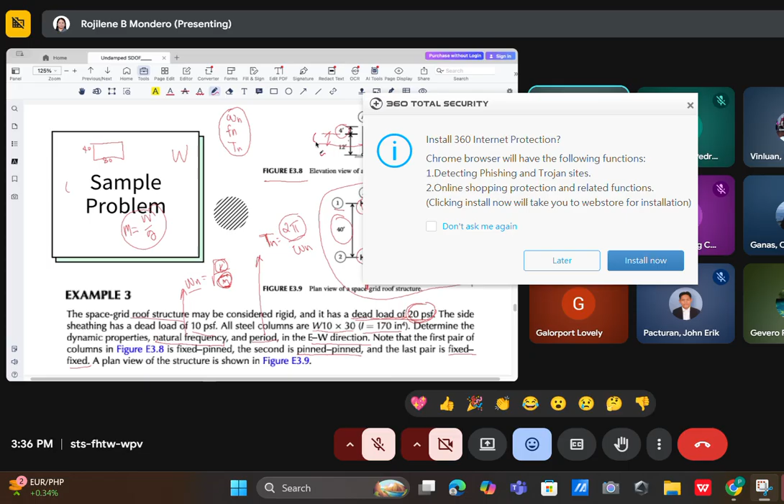So, ikuha nato ang tributary height. Take note also that the tributary height for roof, kay ato ikuha ang dead load, is just half sa below plus iyahang parapet or own height, kung naa. So for this space grid roof structure naa tay height nga 4 feet and then half sa ubos, mao to i-consider as your tributary height. So half of 12 is just 6, plus 4 feet, naa tay 10 feet nga tributary height for the roof.

So to calculate for that one, atong gi-consider ang sheathing, which includes tributary height of the roof nga 10 feet. So if that's the case, kuhaon nato ang iyang tibuok area.

Na, nga lang. So if that's the case, no, kani ato ang kwaon, no, kani nga area. So basically, you just simply add all of this length ni kaning ihang perimeter. Multiply it by the tributary height nga 10 feet. So motong na kay 10 by 240.

So 240 comes with the perimeter of the area of this kanino nga structure nga natay 40, ay sorry, 80 by 40 by 80, then up to 40. Add all of that is equal to 240 nga perimeter. Multiply it by the height, so makuha na to ang sa wall sheeting nga dead load.

Just simply add it with the roof dead load, then we can get the structural weight sa structures nga to ang i-resist, no, sa to ang column. Which is equal to 88,000 pound force or 88 kips.

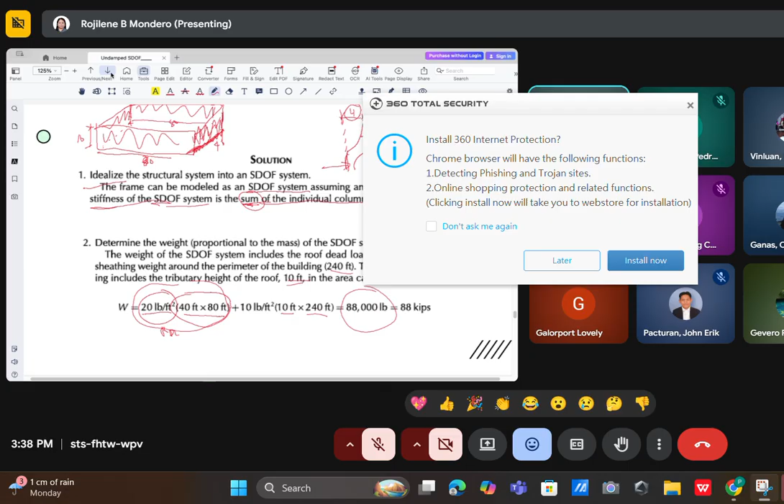So now, okay na ta kang structural weight, no? Makakalculate na tag structural mass later once we divide the weight by the acceleration due to gravity. Taking into consideration that we are using an English unit. So dili ta directly makagamit ni 9.81 meter per second squared. Kay English unit na itong panggamit diri. So we need to convert that one into feet per second squared.

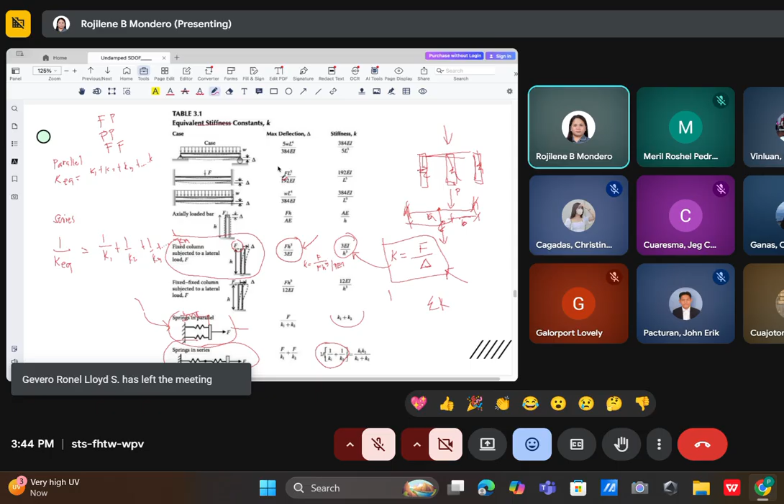Again, I will not provide any formula for deflection. So you must be familiarized or at least memorize the formulas for deflection regardless of the type of structure. That is part of your quiz next meeting. For this one, it's very easy because you're given the formula already. So what if you don't know it? Then you can't solve it if you don't have the formula for deflection.

So for this one, we have fixed-pin, whose stiffness is equal to this one. Take note that the stiffness of column A1 and column A2 are equal, because both are fixed-pin. And also, please take note of this one. If your structure is pin connected at both ends, the stiffness is just equal to 0. The very reason is that there is no amount of force it can exert against deflection, because it is free to move at one point, since it has pin connections.

So it is not the same as fixed connections, which are restricted in all ways: along y, along x, and in moment. For a pin, it is free to rotate. Sorry, free to rotate. When we say free to rotate, it is restricted along x and y only. So the point is that if it has pin connections, the stiffness of that structure is equal to 0. And that is for a column.

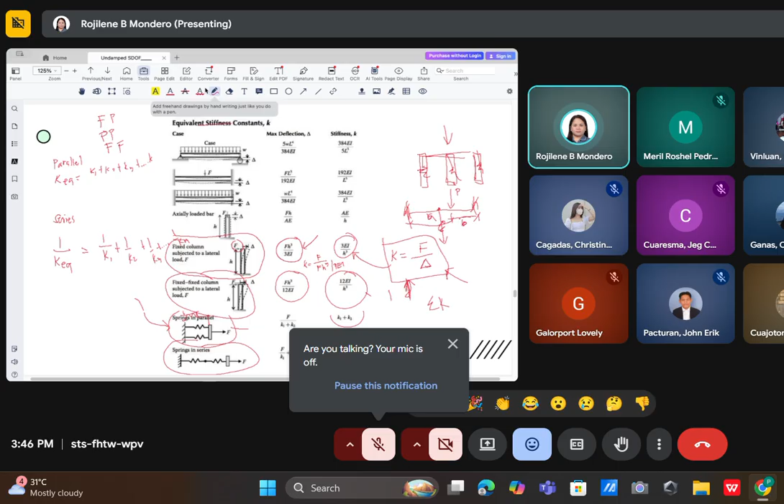The case is different if it is a beam. So for column stiffness with fixed connections, with a lateral force F applied, this is the deflection. I will not derive it; it's a similar derivation: take the reciprocal, then remove F, the applied force, which gives 12 EI over H cube.

So next, we need to calculate the equivalent stiffness of the whole system. We have 6 columns, right? Two are 0, so we sum up only four: two in section A and two in section C, column A1, A2, and column C1 and C2. So all in all, you simply multiply by 2, then add. So we get 30 EI over H cube, wherein the only thing given in the problem is the moment of inertia.

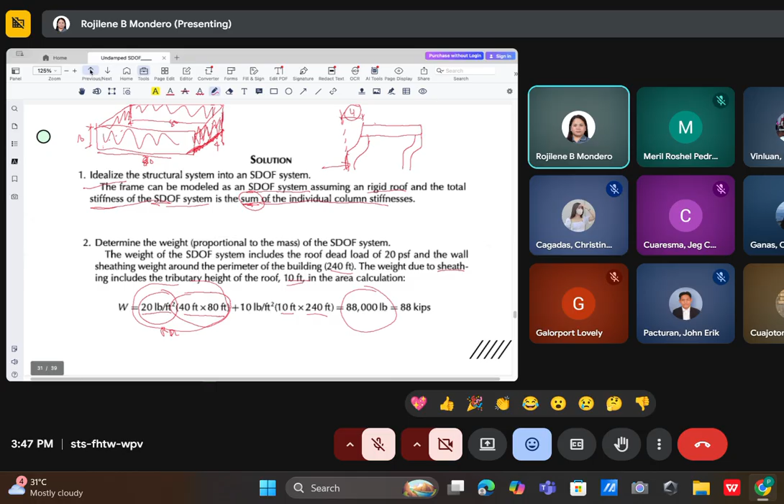So for a wide flange 10 by 30, we have a moment of inertia of 170 inch to the power of 4. The modulus of elasticity is not directly given. There are problems where values aren't directly given, especially when you should already know the value. For example, the modulus of elasticity in metric units is equal to 200,000 MPa, or 200 GPa. In English units, it is just equal to 29,000 KSI.

So please be careful that you are consistent with the units used. If inches, then all in inches. If KSI or kips, it should all be consistent, because your units won't cancel out if they are not the same. So for this one, it's in kilopound force per square inch, so inches and pound force. And we also have inches to the power of 4. So our problem is the height. The height of your column is in feet, given in the problem as 12 feet.

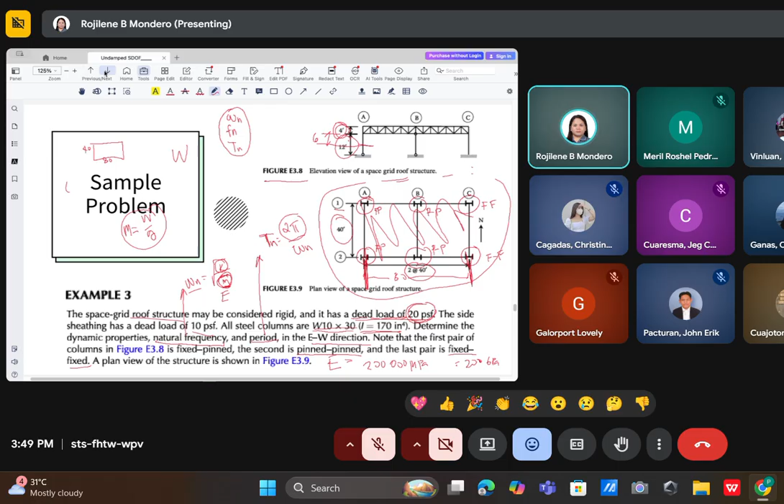So therefore, we need to convert that one into inches. So you just simply convert 12 feet into inches, which is multiplied by 12 directly. So we can get a height of 144 inches, 144 cubed, since the height of the column is cubed. So simplifying that one, then we can obtain 49.5 kips per inch.

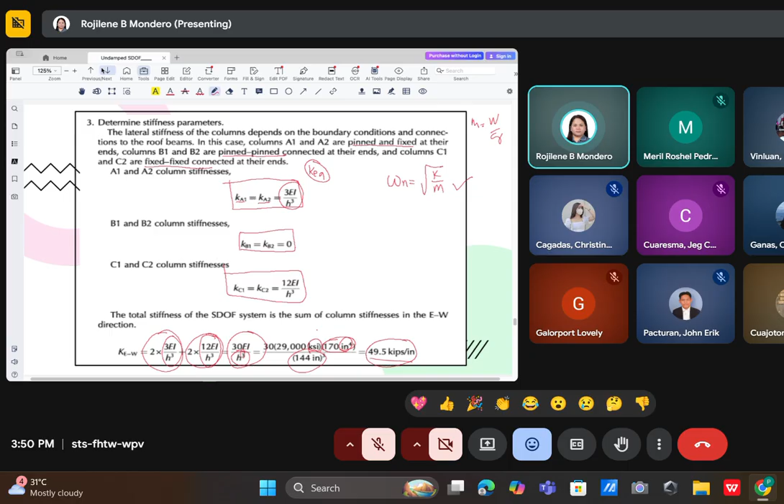So that means we are still consistent with the unit, because they cancel out and result in this kind of unit. So that's one of the crucial parts in our calculations, knowing whether we are still consistent with the units used in the problem. Especially for problems with different units given, you really should secure or check that we are consistent with our units.

So now for the equivalent stiffness, as mentioned earlier. Again, I will repeat it again and again that your equivalent stiffness matters whether it is in series or in parallel. There are other examples where it's given in series. So now, the first part of the problem is to calculate the natural frequency. For the natural frequency, we have the formula of K divided by M, or the K equivalent. So we sum them all up, just add them all. What if it's not parallel? If it's series, then 1 over K equivalent is just equal to 1 over K1 plus 1 over K2, and so on and so forth.

So now, we already know the formula, and we already got the K equivalent. Now we calculate for the mass. We all know that mass is just equal to the weight divided by acceleration due to gravity. What we calculated earlier is 88 kips. So in that case, for the weight, we should also be consistent with our unit, so we can't use acceleration due to gravity of 9.81, but rather 32.2 feet per second squared, so we stay consistent with our unit.

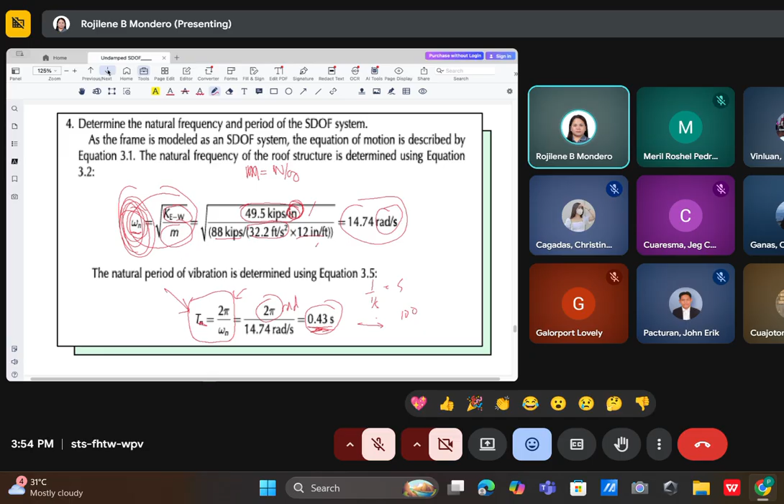Any questions or clarifications from the class? So now, if none, then I will proceed with this one. But before I proceed, let me give an example of when we use series. This is not included in your lecture notes, I just want to discuss it with you.

So for this one, columns resist in parallel, but there are cases in series. So, when can we say the structure resists in series? Say for example, the mass, what resists it? The mass is carried first by the beam, and here the beam is a fixed beam.

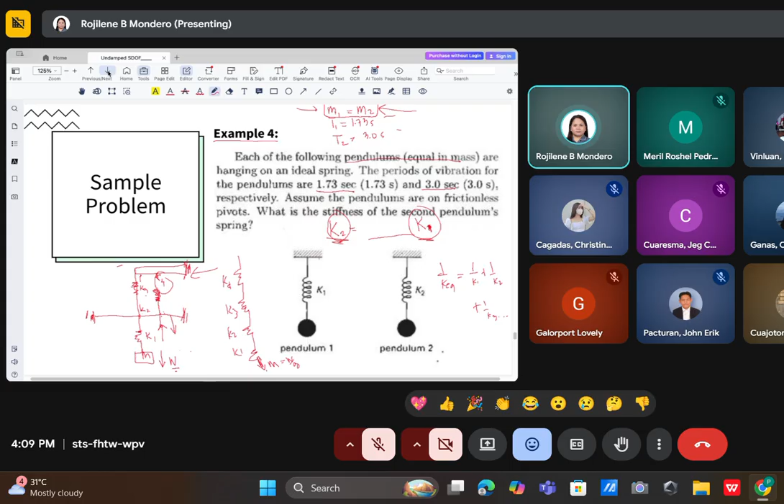So for this one, for example number 4, the goal is to express the stiffness of your pendulum 2 in terms of the stiffness of your pendulum 1. So that's the goal on this part. This is a training on how you utilize the given formula with this limited given sa problem. Simple mathematics lang gyud siya, it's just about how you manipulate the given formulas.

So recall those formulas. We have the formula for your period, which is equal to 2 pi divided by the natural frequency.

We have the natural frequency, which is equal to the stiffness divided by the mass. The given condition here is that mass 1 is equal to mass 2, so let's express everything. Also given is that T1 is equal to 1.73 seconds and T2 is equal to 3.0 seconds.

All we need to do is express stiffness 2 in terms of stiffness of pendulum 1, so let's get the relationship between those stiffness values. The most useful thing here is that M1 is equal to M2. So we must express M1, then make an expression or value for that, then M2 as well. To do that, we have a given value for the period.

This can be used, and then we put in this value of natural frequency here. So therefore, we can obtain this, where period is expressed in terms of mass and stiffness. The reason is that those three are given in the problem: mass 1 is equal to mass 2, period is given, and our goal is to express stiffness of the second pendulum in terms of stiffness of the first pendulum. So this is the crucial part, that we need to express it into one formula: period, mass, and stiffness. To do this, let's start here.

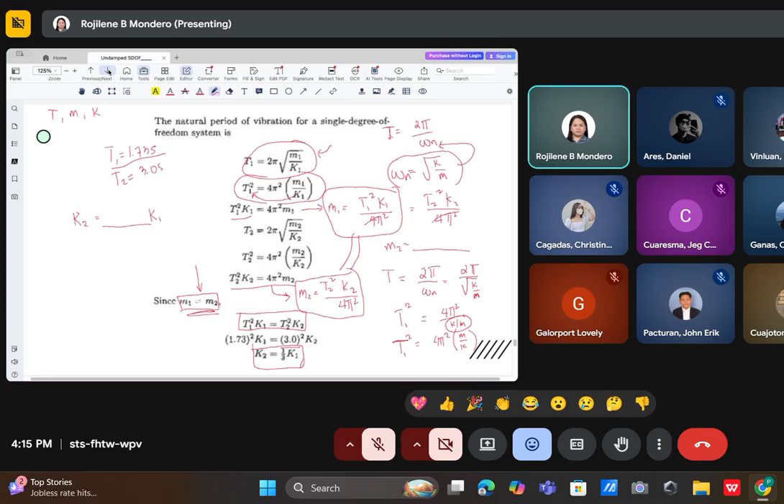If none, then for the last topic on approximate values of structural period, we will not focus on this one because these are just approximations. Actually, you can measure the period, depending on how long the earthquake lasts. The reason it's just an approximation is that you can approximate it based on these tables, these factors based on different codes. So we will not go into this one.

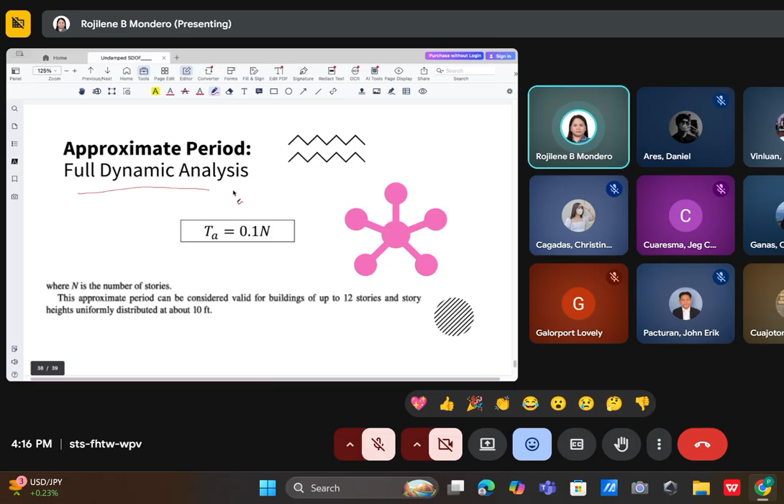You may not include that; we will not consider that in your quiz next meeting. Again, this is just an approximation depending on the type of structure, like for example shear walls, versus full dynamic analysis, which involves very detailed calculations of period. There's also the 0.1 times n approach, depending on how tall your structure is, based on the height.

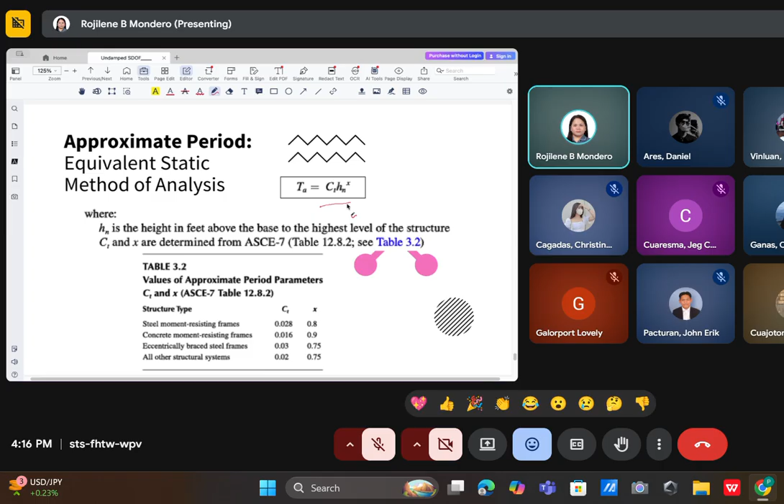So I guess that's all for this discussion, for the undamped SDOF. Any questions, clarifications from the class?